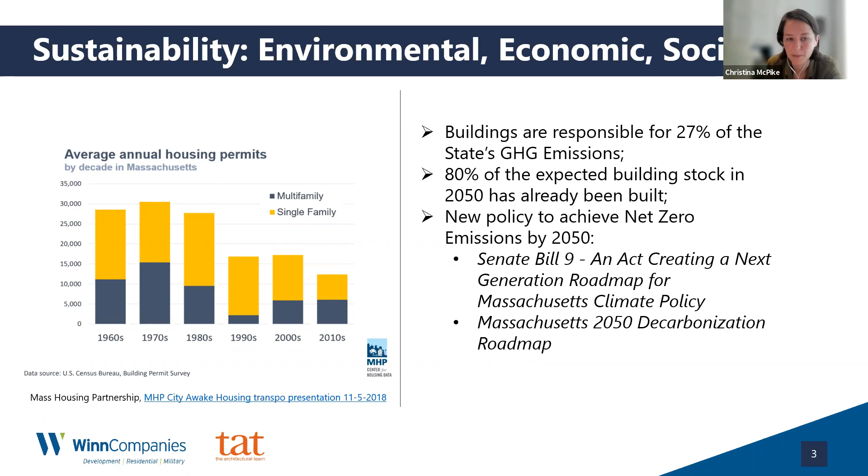There are all kinds of altruistic reasons why we are building sustainably and thinking about and caring about green buildings and high performance design. There are also other industry drivers between code and zoning and permitting, but also financing. For years, Winn has combined the historic tax credit with the low-income housing tax credit in order to secure adequate resources to undertake these complex types of projects. When seeking competitive low-income housing tax credits, we're working with state housing finance authorities and responding to their qualified allocation plans, or QAPs. Year over year, these QAPs have become more aggressive or stringent, or maybe environmentally responsible, in pushing us developers and owners towards higher performing, better performing buildings.

Over just the past 5 years, the QAPs have really matured in how they're thinking about high performance design. You can compete with your peers, other developers, getting more points the further you go. So for historic preservation projects seeking 9% competitive LIHTC resources, we have to figure out how to compete with new construction high performance design standards at the same time to secure the higher points in the qualified allocation plans. Not an easy task, but something we are working together on with SHPO and NPS and our design and engineering teams to figure out.

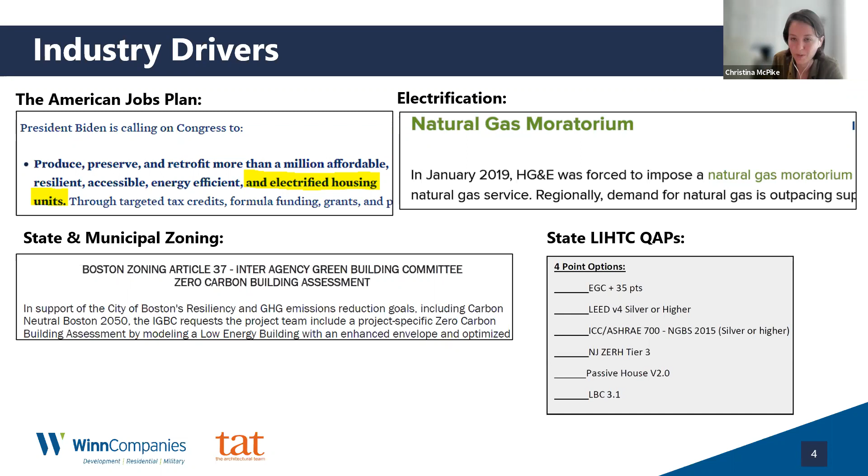There are other drivers as well. Electrification is a word I don't think I used before 2 or 3 years ago, and now I might say it a dozen times a week. Between natural gas moratoriums, given gas pipeline and supply issues, or moratoriums based on emission reduction goals at the local or state level, these buildings can't use gas anymore, or are limited in how much they can use for heating and domestic hot water. So we're electrifying these systems. And when electrifying using heat pumps, we have to insulate and air seal our exterior envelopes, which is all the more challenging in a historic structure where we care a lot about the exterior skin of the building.

So despite the barriers and challenges and maybe my scary introduction, we've been able to do it, and we're excited to present on the Tyler and to present a new project, Stone Mill in Lawrence.

The Tyler is built, it's 100% occupied with a wait list, which is amazing. This was an old high school in East Haven, Connecticut, 3 wings, originally from 1936 with additions in 1964 and 1972. We converted the 1936 wing and the 1964 wing into 70 new mixed income apartments. We demolished the 1972 wing, and the city of East Haven retained ownership of the rear section of the building, which is used as a gym and swimming pool for the community to this day, and through construction, which was fun to coordinate.

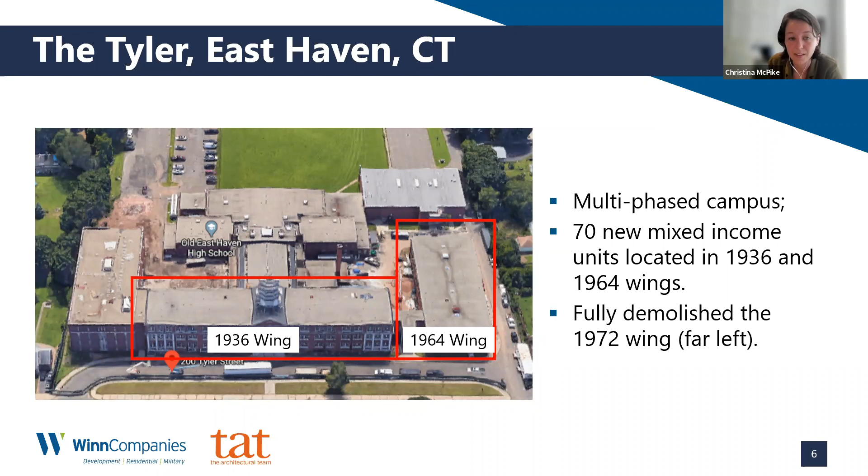In response to Connecticut Housing Finance Authority's QAP, which was awarding maximum points for passive house design, we identified the European Passive House Institute's EnerPHit standard as a way to integrate passive house principles in an existing historic adaptive reuse project.

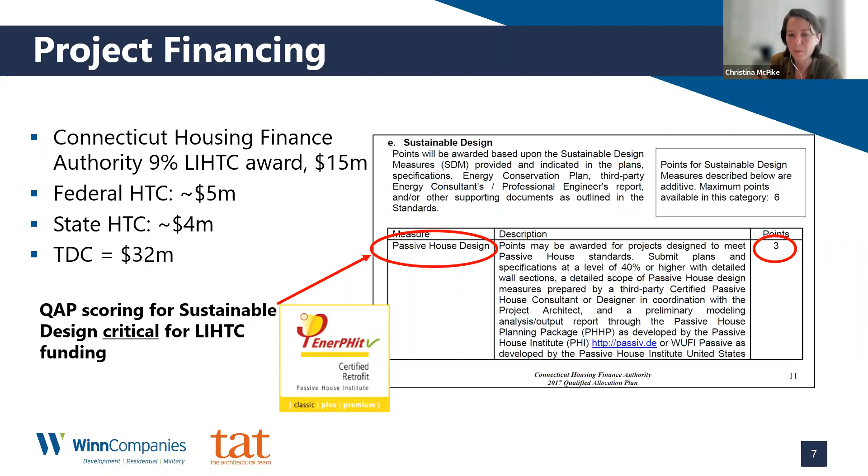The EnerPHit certification path is really remarkable. There are a lot of historic buildings in Germany where this certification standard originates, and they allow for specific waivers, and historic preservation is a reason why they may allow for a waiver against a prescriptive energy requirement. You still have to satisfy the performance requirements, so maximum heating and cooling demands, but the way you get there can be customized based on the building and project needs.

So we were able to select that certification path and apply for the 9% LIHTC to CHFA and receive funding, which was critical in combination with federal and state historic tax credits to getting this project done.

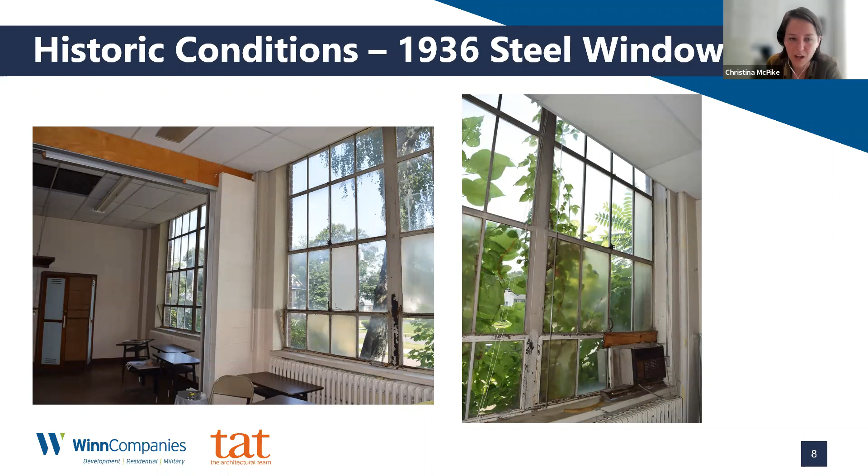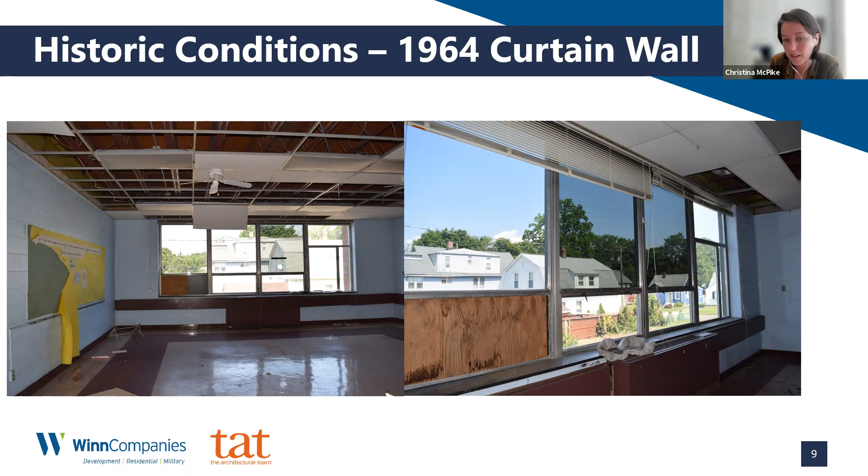Here's a shot of the original 1936 steel windows, the 1964 curtain wall. These are historic conditions that we had to replicate with the historic adaptive reuse scope of work, and presented numerous challenges related to EnerPHit. How do you replace an aluminum or steel window with a high performance replica model? This was a specific area where we had to seek a waiver from the EnerPHit certification plan.

As a school, there wasn't a ton of interior historic character or details that we were preserving. Some unique wall tiles, terracotta flooring, those were all left exposed. So this was exterior wall area that we were unable to insulate and needed to accommodate for elsewhere in the building with more insulation or more high efficiency equipment.

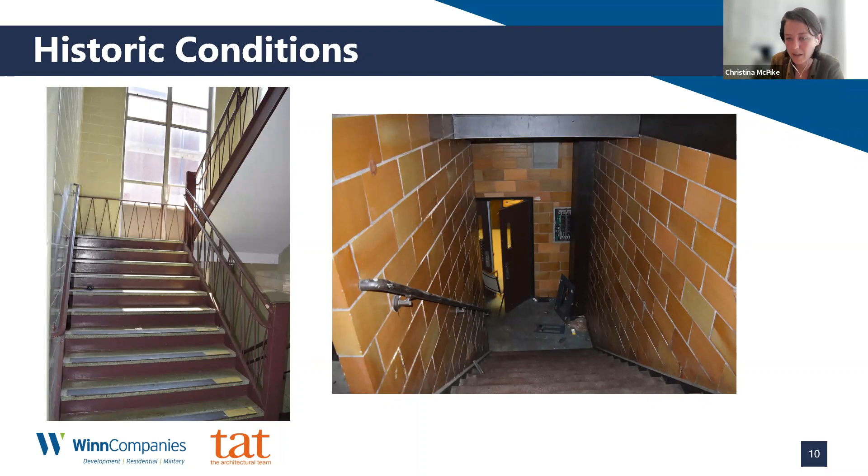Overall, the impact of the EnerPHit commitment added about 6% to the total construction cost, or $1.2 million. This was spent primarily on more and better insulation, as well as extensive air sealing throughout the building.

The EnerPHit program, similar to the Passive House New Construction program, has a whole building blower door test requirement at the end in order to reduce or really eliminate air infiltration through the exterior envelope, keeping all of your conditioned and ventilated air controlled and within the thermal envelope.

In addition, one of the major changes was getting away from gas heating. So the project incorporated a variable refrigerant flow heat pump system for heating and cooling, along with a very high efficiency energy recovery ventilation system that was aerosealed in order to really dial into specific airflows to bedroom and all living spaces throughout the building.

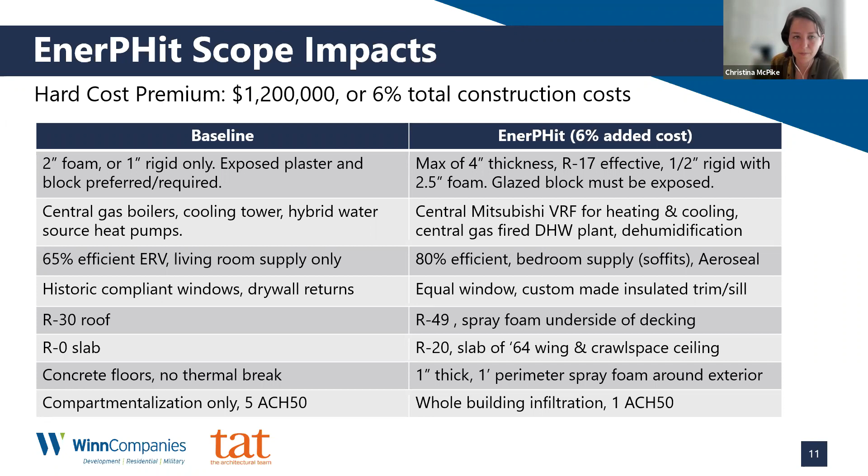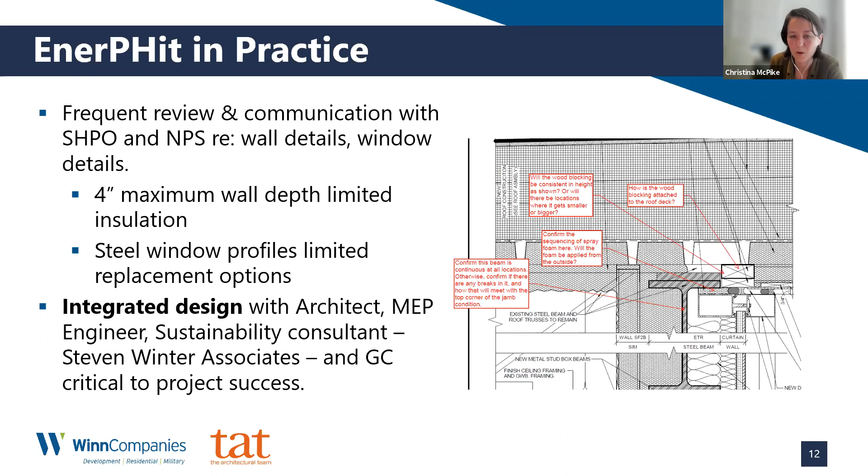The project relied heavily on an integrated design process. This wasn't just TAT being a great architect, which they are, but it required iterative design and a lot of collaboration with the mechanical, electrical, plumbing engineer, with the sustainability consultant, which in this case was Steven Winter Associates, as well as the general contractor. And I should mention SHPO and NPS as well, key partners in making this project happen. They were extremely communicative with us around our EnerPHit goals and program.

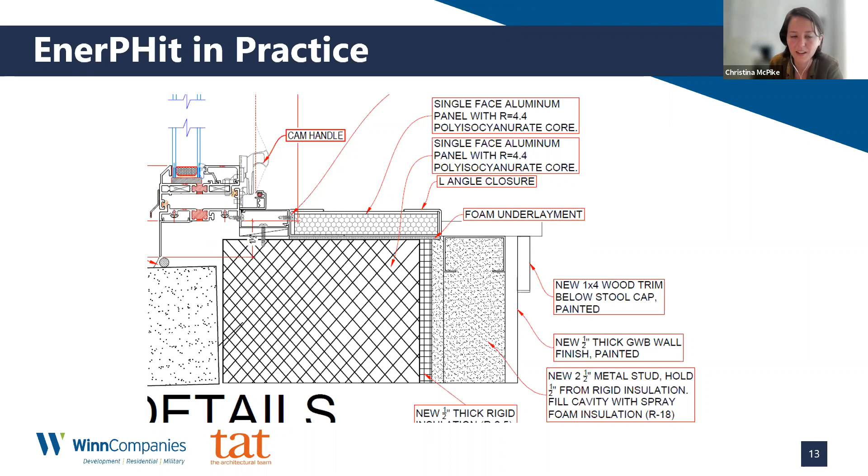We had to come up with some specific unique details in order to deal with the thermal bridging at the exterior masonry wall. We actually had a custom made insulated return panel made for the sills, heads, and jambs of the window openings that wouldn't interfere with sight lines of the window. It's a unique condition and a creative solution that TAT was able to come up with.

As expected, the building required a lot of insulation, and with limited sight lines and therefore limited volume to play with, we needed to select a high R value insulation, meaning there's a lot of foam in this building, something we're hopefully going to improve upon in the next one. But it's a reality of getting the R values we needed at the roof and wall assemblies without building a 6, 7, 8 inch thick wall. We were limited to a 4-inch furred out wall assembly on the exterior envelope.

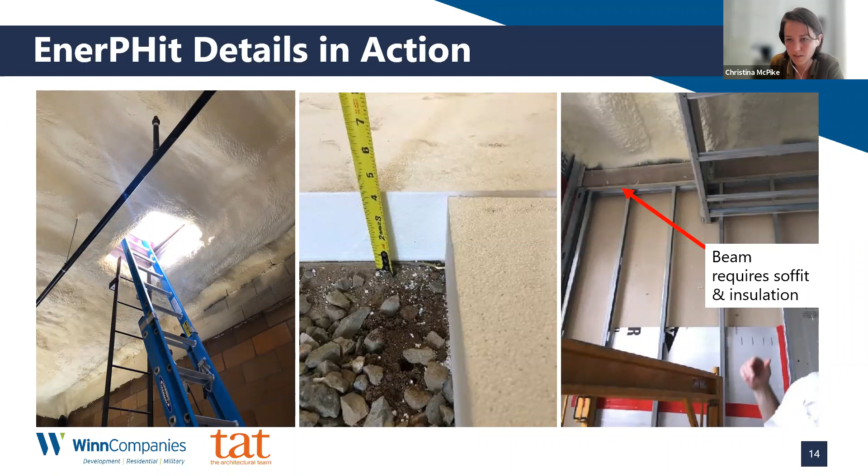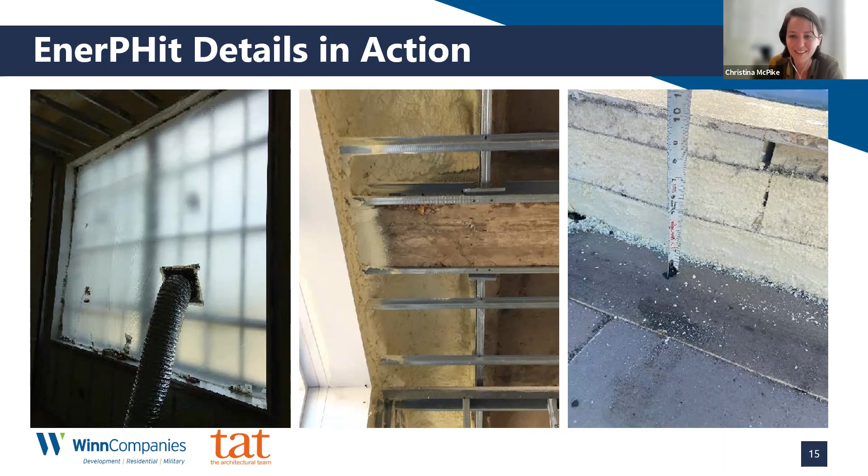We had inspections almost every week, including testing windows for air infiltration, the blower door test at the end that I mentioned before, but also inspecting insulation depths and quality, and looking for any conditions like a concrete beam that was a huge thermal bridge interrupting our insulation. We actually wrapped the ceiling on every floor about 2 feet to help bridge that thermal gap. This beam was interfering with the ceiling height, which interfered with the window sight lines. Dealing with this in real time in the field with the contractor happened all the time in this project, and I think we'll be able to be even smarter about it in the end.

So we're taking all the lessons learned from the Tyler, which is a great project, and going even further at the Stone Mill in Lawrence, which is a project that's in design development now. This is the oldest structure in Lawrence, Massachusetts, just shy of 150,000 square feet. We're converting the building into 86 new mixed income apartments at a range of AMIs, or area median incomes, including 17 market rate apartments.

Unlike the Tyler, which had gas domestic hot water and gas preheat for the ERV system, Stone Mill won't use any natural gas at all. It will be all electric. One of the impetuses here, among a long list, is the Columbia gas explosions that occurred in 2018, and a commitment from the Merrimack Valley to try to get away from and eventually eliminate and phase out fossil fuels as a result, but also in alignment with Massachusetts decarbonization roadmap.

So with this historic adaptive reuse and the production of new units in Lawrence, we committed to making them all electric so that we're not adding new fuel loads to Lawrence. And I want to give some credit to Department of Energy Resources for the Merrimack Valley Relief Fund, which is an effort underway currently in the state to help support high efficiency design and initiatives like what we're doing at Stone Mill.

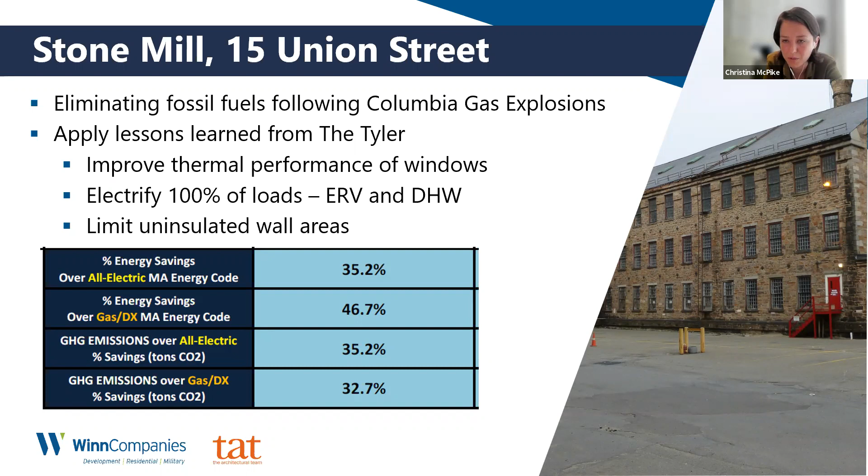I'm going to let Scott get into the specific design details at this stage with modeling support from R.W. Sullivan, who's the MEP engineer, as well as modeling from New Ecology, who's our sustainability consultant. The project is projected to use about 35% less energy and produce 30% less greenhouse gas emissions than a brand new construction code compliant building in Massachusetts today, which I think is an enormous accomplishment that we're really proud of and excited to deliver on early next year. So with that, Scott, I'm going to hand it over to you to jump into some of the details.

Excellent. So yeah, as Christina was mentioning, Stone Mill, Lawrence, Mass, it's the oldest building in Lawrence. I think it's actually one of only two buildings remaining that are actually built from stone in that city.

So as we were going through some of the highlights, some of the design highlights we'll be discussing is the all electric heating, cooling, ventilation, domestic hot water with the historic replica windows and the simulated double hung windows.

That was, as Christina was saying before, a collaborative process with our historical consultant, with SHPO and with National Park Service, as well as our engineers and our representative at Peerless Windows. It just goes to show that with these adaptive reuse projects, it really can't be designed by one person. You have to have a great team in order to get through them and complete the projects to everyone's liking.

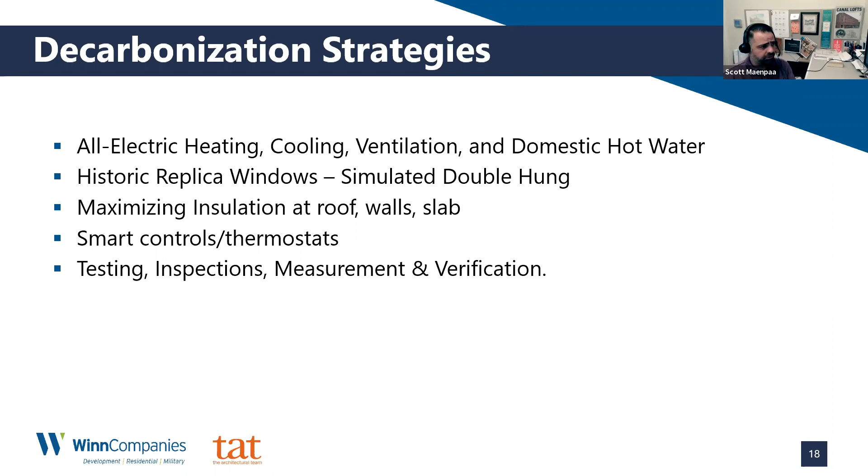We're maximizing the insulation at the roof, the walls, and the slab. We'll go into a couple ways that we're going to do that. Smart controls and thermostats, as well as the testing, inspections, and measurement verifications that Christina touched on at the Tyler. I think we're going to get even more stringent with some of those testing and inspections at Stone Mill.

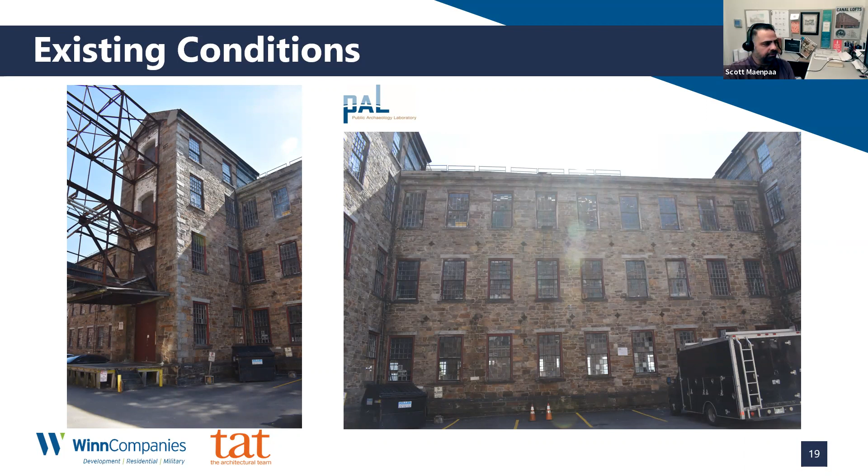Going through the existing conditions, again, stone exterior facade, the exterior walls vary in width, typical with masonry construction, turn of the century. The lower walls are thicker, and as you ascend through the building, the depth of the wall gets thinner because there's less load that they're carrying. So it's more like an early on value engineering exercise, how they could reduce materials and get these buildings built.

...16/16 sash. So with historic preservation and with National Park Service and with SHPO, obviously the exterior of the building is a very high visible, high area of concern to rehabilitate and bring it back to its original form and its original glory.

So we work hand in hand with them, developing our approaches, and they review and eventually approve. So with the windows at this property, we have over 300 windows.

One of the SHPO, one of the National Park Service requests was to do a full building survey on these windows. Basically, we had to survey every window to determine whether or not it was original or if it was replaced over time. And one curveball this building threw at us is all the windows appeared to be original.

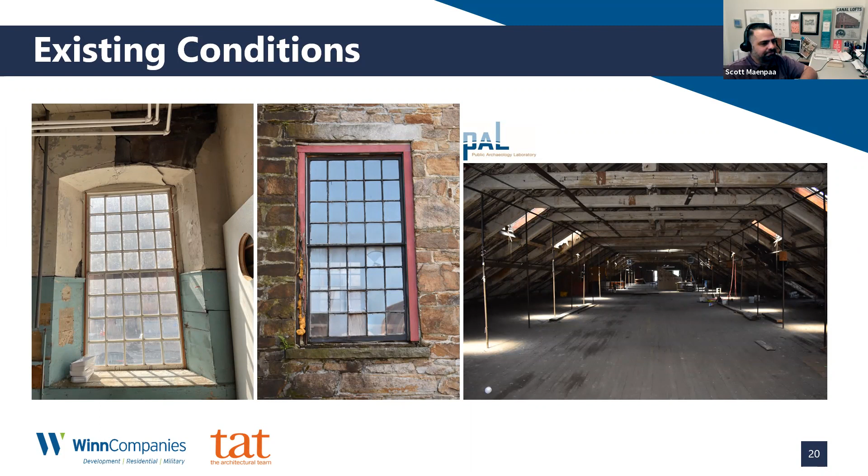One of the key things is we're working with a pitched roof. Most of the mill buildings or school buildings we've come across have a flat roof or a 1 to 3 pitch where we can still put mechanical equipment on. And given the sight lines, if you've ever been to Lawrence and driven down to see this building, you'll notice once you get off of 495, you're basically coming down and this is right in front of you.

We don't have the sight lines to put mechanical equipment on the roof. We have an existing slate roof that we are replacing, but we do have this attic space. So we decided to go with a cold attic approach, essentially replacing the slate on the exterior, doing the structural rehabilitation on the inside, but then creating our roof and insulation membrane inside that attic just above the units.

So we're going to go in there with some 2x framing, lay that down. We're going to spray foam to get a nice air seal between the units and the cold attic. And then on top of that, we're going to drop our polyiso rigid roof insulation and protection board.

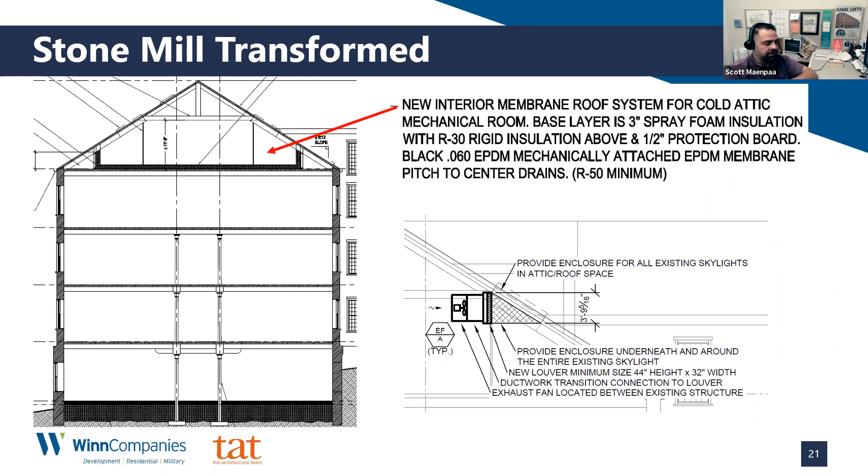The other cool feature about this roof is there's a number of different skylights, and again, working with SHPO and National Park Service, we've been able to come up with a plan to replace those skylights with louvers. That allows us to get exhaust fans that are going to circulate air within that cold attic space for our mechanical equipment, for all our VRF systems that are going up there. So that's key to having that be an indoor space to circulate that outside air within there.

So you can see there's a number of existing skylight locations that were original to the building that are going to be reused and put in with louvers, as well as a couple of windows on the ends of the buildings that will also be retrofitted with a louver type assembly in either the upper or lower sash to, again, circulate that air and allow us to hide all of our mechanical systems up within that cold attic space.

Working with R.W. Sullivan on this project, I know Christina gave them a nod early on with the energy modeling, but it's been a really great process going through and coming up with these solutions. It's the first time, every mill building is different, so it's one of the first times going through this design that we've had to come up with a couple different solutions that aren't necessarily your standard practices in construction, but will work nonetheless.

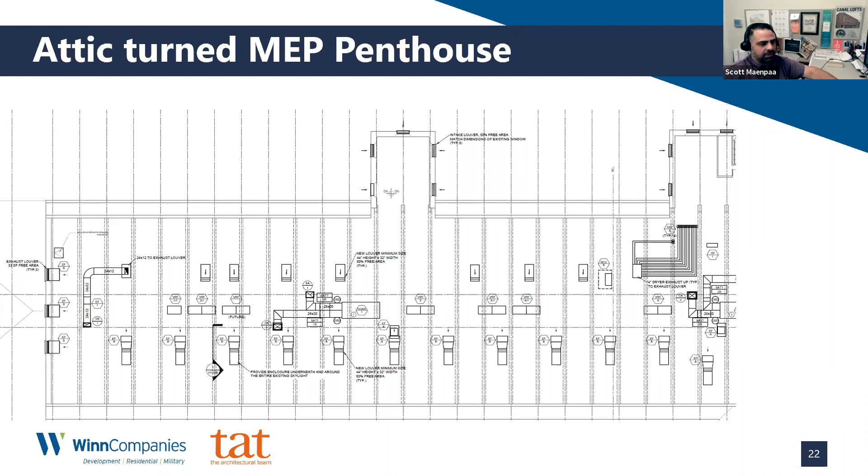As Christina was able to petition the DOER and get the project a large amount of grant money, we've been able to get creative and try to limit the amount of thermal bridging we do, because we are going all electric, and really make that exterior wall perform as well as it can, while sticking with the Secretary of the Interior standards for a maximum 4-inch projection.

So what we've come up with here is basically we're going to be framing all the exterior walls with wood studs on the flat, so that we increase the amount of insulation behind them to limit that thermal bridging from the exterior wall.

As I mentioned before, the depth of the wall on the ground floor could be 29 inches thick, which sounds like a lot, but when it's masonry construction, that doesn't really give you a high R value. But when you get up to the 4th floor and the attics, the wall is only 18 inches thick, so you're going to get even less R value there.

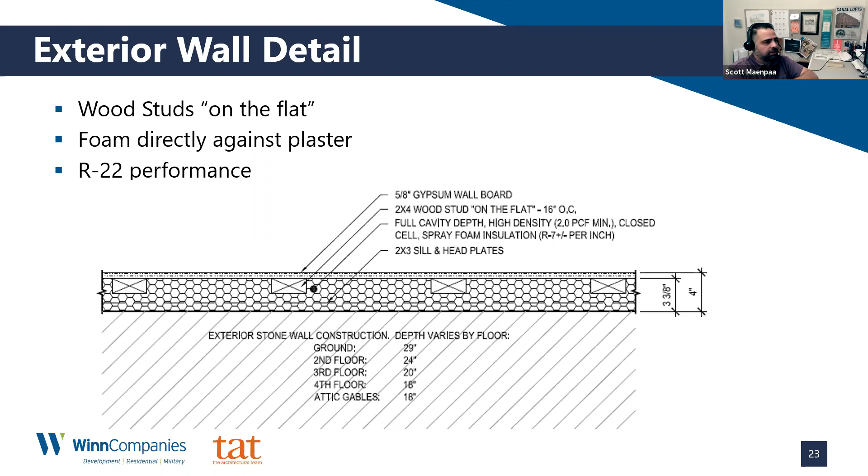Going into the windows, this was a great process where Christina introduced us to Peerless Windows. We've used them in the past, and they've got a great product. I personally had never used them before, but the representative there, Dennis Spear, has been excellent.

So Historic went out and did a detailed survey and evaluation. We typically use an extruded, thermally broken aluminum frame on these windows that gets a U value of 0.42 — the higher the U value, the worse performing the window. With this window, we're going to be able to get that down to 0.29, a huge reduction in U value, which is just going to help our performance even more.

A couple of key features of this window, going with Historic: they're all historically double hung windows. Double hung windows, or even single hung windows, are very leaky as far as air leakage. So what we've come up with here is this is actually going to be an awning window.

The full unit is a top tilt out awning. It's going to resemble a double hung, simulating the double hung with a meeting rail detail showing the true glass in different planes and the shadow line produced on the bottom sash. By doing the awning and simulating the double hung, that makes the window perform all that much better and allows us to do the 100% electrification.

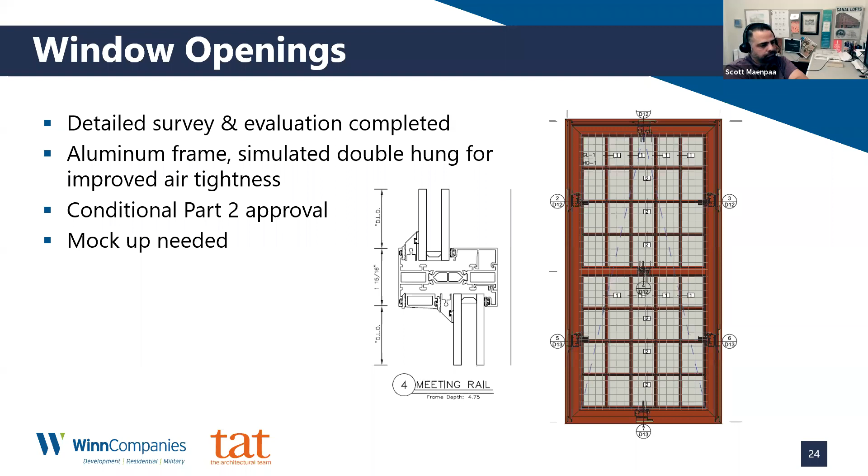Traditionally, the drywall and the plaster did not go up to the window frame. So this is just an example of how we go through this iterative process with the energy folks and the engineers - it's a back and forth until we can find a solution that works for everybody.

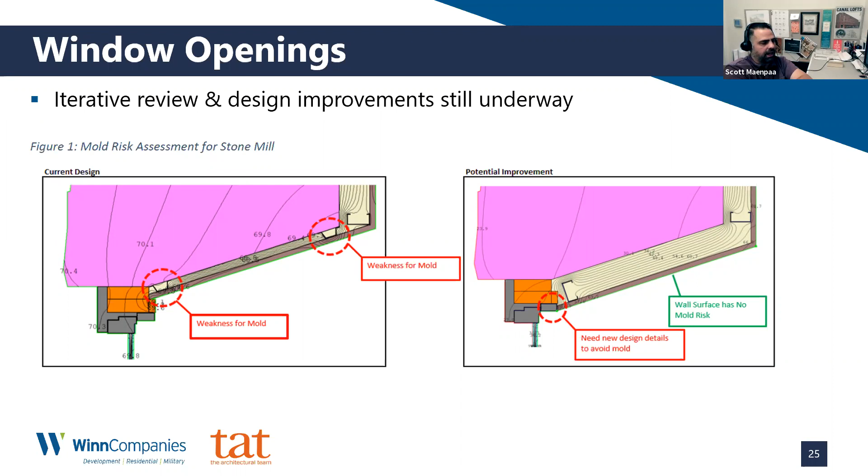So the potential improvement, although we get a lot of insulation in that jamb, isn't going to be conducive to maintaining or replicating the existing historic fabric there. We'll have to go back through another round of this, and maybe find a different material, maybe an asymmetric channel with one leg open, where the insulation can get behind it without creating a gap that's a weakness for mold.

This is the slab I was talking about earlier. We need to put in crushed stone - that height varies from 2 feet to 3 feet, again to get it out of the floodplain and also get a little freeboard on that floodplain to account for the next 150 years this building will be standing until its next rehab. We're doing 6 inches of continuous rigid insulation to give us our R30, and then 2 inches around the slab perimeter, getting us double what code recommends, which is R5.

We did a similar detail at the Tyler, driven specifically by the EnerPHit program, which has comfort criteria requirements - the surface temperature in any living space can never drop below, I think, 58 degrees. We modeled the slab for the garden level or ground floor units, and modeling showed that in winter the floor could get too cold, creating risk for condensation and durability concerns. It wasn't in a floodplain in East Haven, Connecticut, but working with SHPO and our historic consultant, we were able to raise that slab by 6 inches in the ground floor of the 64 wing of the Tyler. Similarly, but for a different reason, we're doing the same at Stone Mill, checking two boxes at once - durability, comfort, thermal performance, but also avoiding flooding risks.

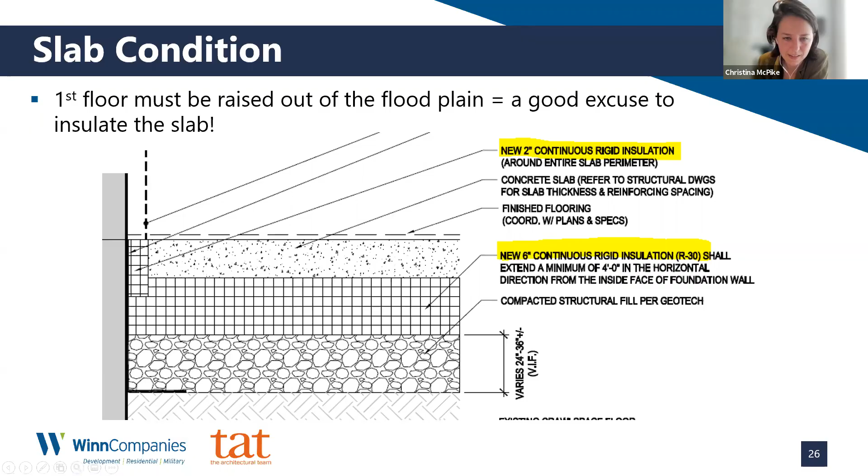Before we jump into questions, I'll add something I kind of glossed over, trying to be cognizant of time. After construction at Stone Mill, we will do a whole building blower door test, and in addition, we will test the apartments for compartmentalization. This is related to indoor air quality, controlling odor, but also sounds and air movement between apartments — apartment to apartment, apartment to corridors, and from the building to the outside. We want to keep thermal and conditioned air inside the thermal envelope, and control air movement between apartments as well.

We generally follow the EPA Indoor Air Plus standard, which is required for Energy Star and for PHIUS passive house certification in new construction. It's not technically required for historic adaptive reuse projects — we're actually exempt from energy code in many cases — but in all cases we're trying to outperform what we'd otherwise have to do anyway. The Tyler and Stone Mill are really good examples of where we're doing that.